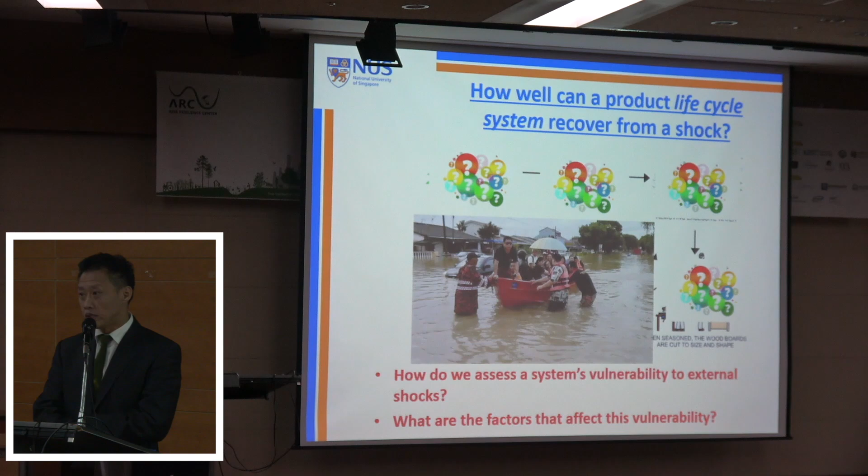How about the upstream processes or upstream life cycle stages, like in the forest, if access to the forest is affected? All the downstream life cycle stages will be affected as well. So the research questions therefore are: how can we assess a life cycle system's vulnerability to such external shocks, and how can that vulnerability be reduced and resilience be increased?

So guided by these questions, we went on to look for a framework or model to see how we can do these two jobs better. The content of my presentation today is going to start with a very short discussion on the concepts of resilience and sustainability.

So if we are setting off to look for a framework to talk about life cycle resilience, life cycle sustainability is a good place to start. And by that, we have to look at some of the existing LCSA, or life cycle sustainability assessment frameworks we have. Today I'm just going to very concisely present two of these.

I'm going to start with this one, which is basically an LCSA framework that combines all the different LCAs of environmental impact, costing, and social LCA. Not too long ago, a few colleagues of mine from the International Society for Industrial Ecology came out with this different framework. Basically what they've done is taken the conventional ISO way of doing LCA, identified this, and modified it into this.

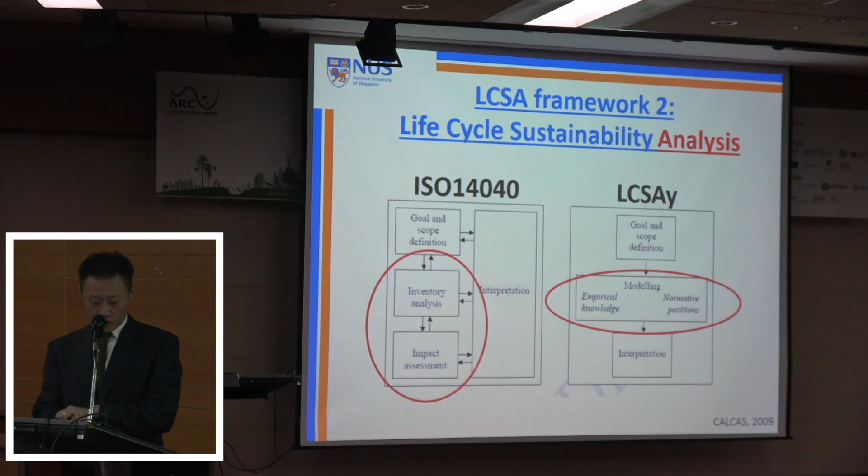If you allow me to blow this up so you can see what's inside, it is this massive flowchart. To summarize, what they are trying to say is that when doing life cycle studies, we have to broaden the object of analysis. So it's not just on the product level anymore, but all the way up to the economy level. That's when you can see even more trade-offs and interlinkages.

Furthermore, at every level, they encourage us to look at all three aspects or domains of sustainability: economics, social, and of course environmental effects. So by that they mean we have to broaden the scope of indicators.

So is that the most perfect framework out there? Well, not quite. What I mean is that although they have identified stakeholder engagement as key, as well as uncertainty analysis, you find these are still missing pieces. We need more wisdom and input in these areas. And there are more. These are the 4 points I've identified when it comes to pinpointing the missing pieces of these existing frameworks.

And the first point here is definitely on the very concept of resilience and vulnerability and how they can be applied to a life cycle system.

So with that knowledge, and the fact that there are 4 gaps in the current framework, and these are the 4, we have come up with a new model. Some of us call it the framework known as LiCSUA, or Life Cycle Sustainability Unified Analysis. Long word, that's why we need an acronym.

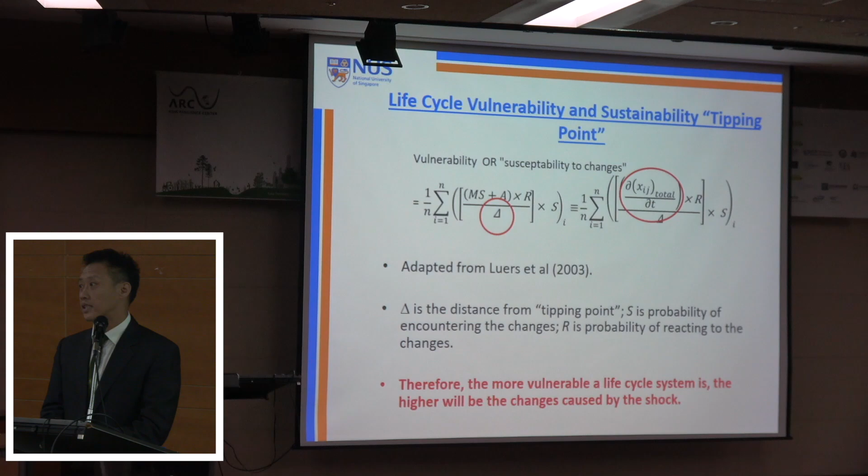Okay, can it be used? Yes, we have shown how it can be used, and I'm going to make use of a case study of wood plastic composite to show how this particular framework can be used. Bearing in mind, once again, that I'm not saying this is the only way of creating this model and framework out there. There are many different ways, I believe, but ours may be the first life cycle resilience model out there.

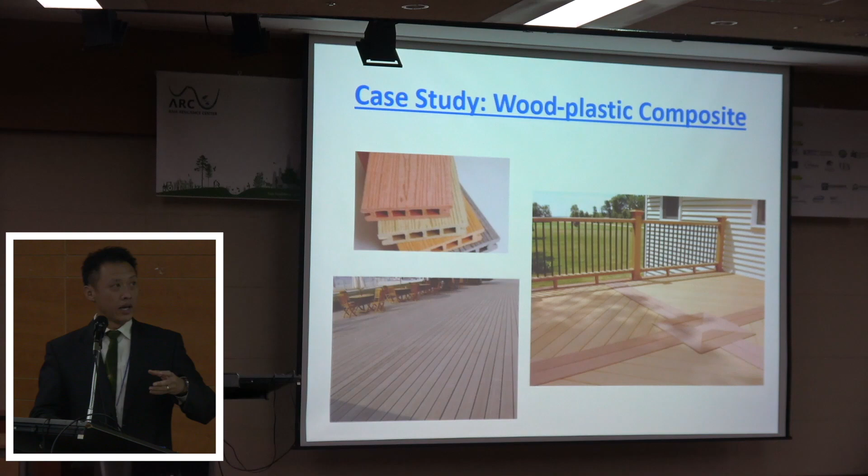So, wood plastic composite is a kind of material that combines plastic, most of which recycled, and recycled wood fiber to make different components like this. It is quite an effective way of using recycled materials.

So the background of the problem statement is this: we assume that there is a policy being made, and the success of this policy is on the number of local residents who are engaged and who really devote their time to doing waste sorting behavior. And all these are just the way we set up the model.

And most importantly, a shock, a flash flood, is introduced in the system. So how does the wood plastic composite life cycle system react to this shock, and what can we do about that? We went on to define the rebound effect, and I have to say that this rebound effect is not a real effect. We are just trying to see how this system will react should there be such a rebound effect. And of course, we have defined this mathematically in our model.

So what have we got? Before that, more details about how we have defined the interdependencies of life cycle stages and the stage resilience. Once again, this is what I've shown you just now. By interlinkage and by dependence, what I mean is that this particular life cycle stage, for example, is dependent on how much you can access and get from the forest, and so on and so forth.

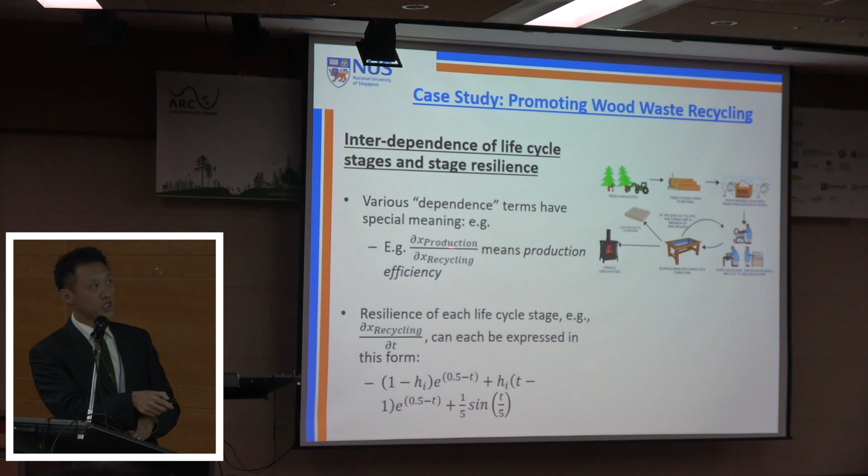And in this case study, you'll find that all these mathematical terms suddenly hold physical meaning. For example, this particular term means production efficiency, and that is how much you have recovered is actually used to produce the WPC, and so on.

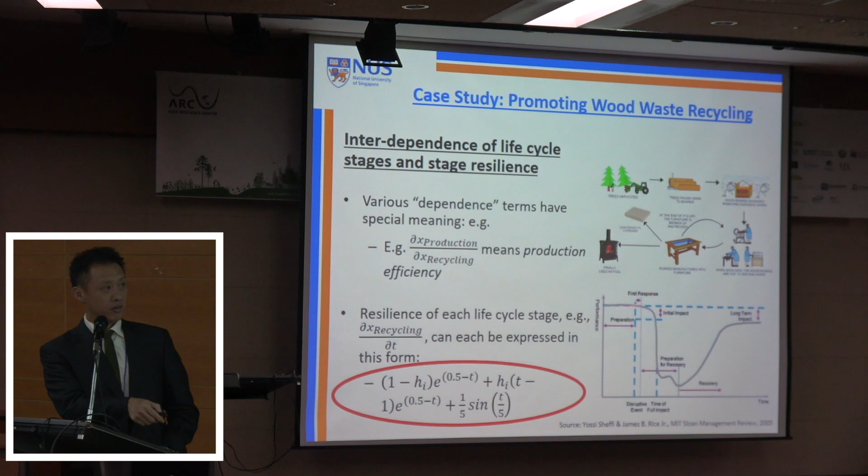And the resilience of each life cycle stage, these terms are given this particular form. This may sound and look scary, but they are not. In fact, this is the kind of equation that you get for describing this popular curve that shows how a system rebounds or how a system recovers after a shock.

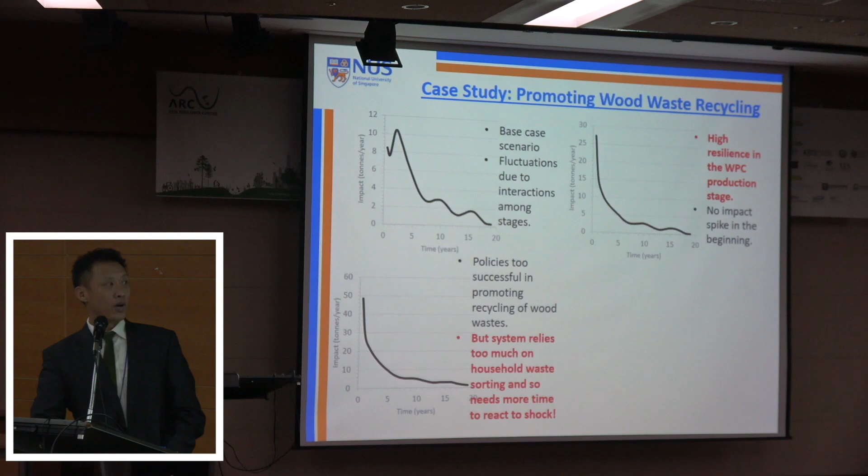What happens if the policies have been too successful, talking about trade-offs or unintended consequences? What we found is that sometimes when a policy is so ingrained, so successful, it really depends on our ability to sort our wastes. When it comes to flash floods, the last thing in mind will be to sort our wastes. If that happens, the whole system runs into havoc, and it takes a longer time to recover. So too much of a good thing may not be good after all.

That's a lesson that we learned.

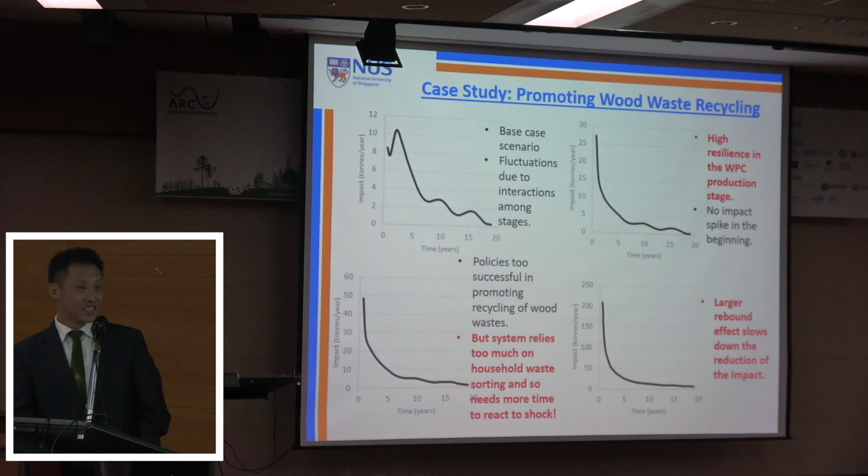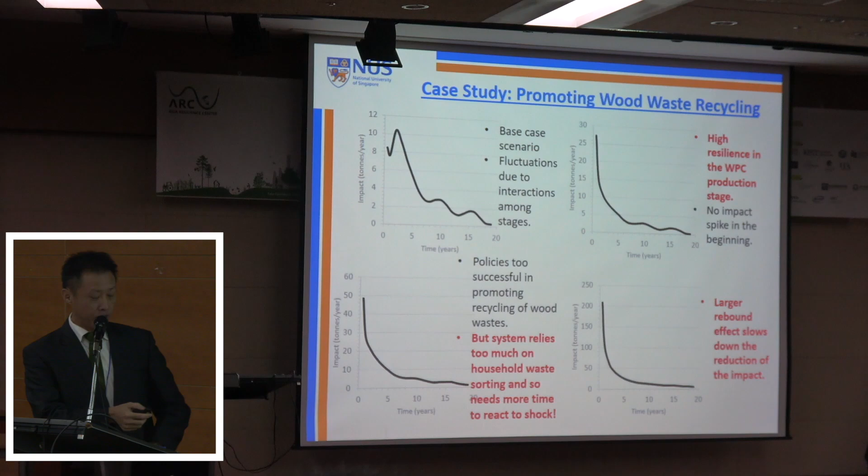Last but not least, what happens if we have a larger rebound effect? If we have a larger rebound effect, that reduction is going to slow down even more. I published this not too long ago in the Industrial Ecology Journal.

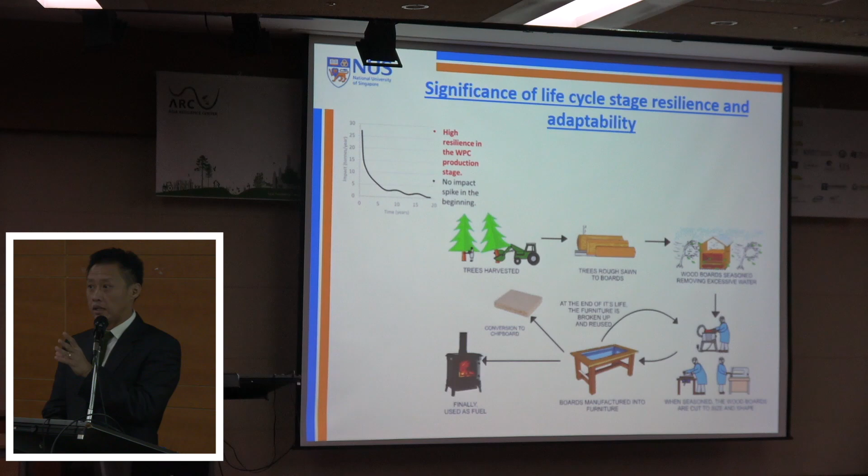Of course, this idea about how individual life cycle stage resilience can help focus the different types of research is helpful, and I would say this is what pushes us, the university as a whole, to look at the different types of resilience research.

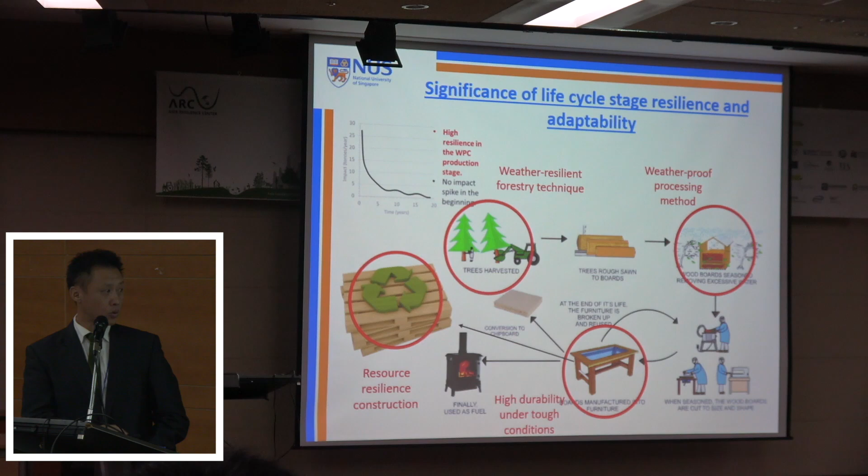My other area of research is resource resilience construction, and that brings me to the other part of my research, which I intend to just very briefly go through.

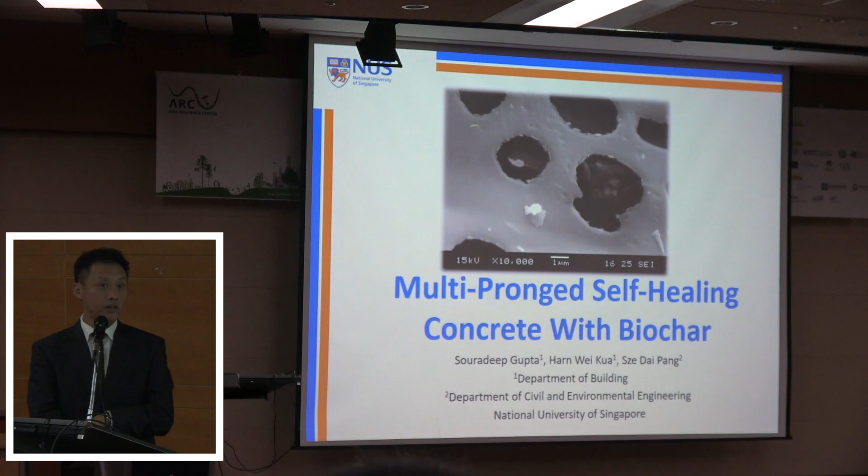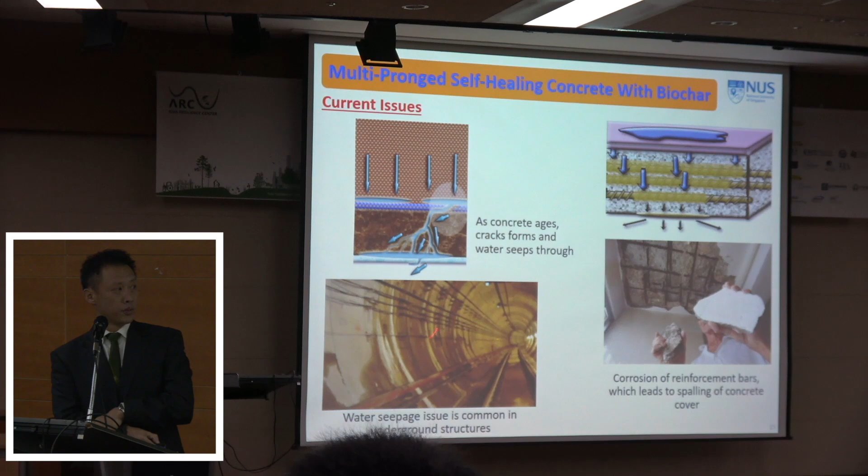It is about how we can make use of biochar to enhance a certain aspect of concrete, which is the self-healing aspect. We know that when concrete ages, cracks will form, and water will seep through, which can cause a lot of problems like spalling. This will be a major problem if we are talking about underground construction.

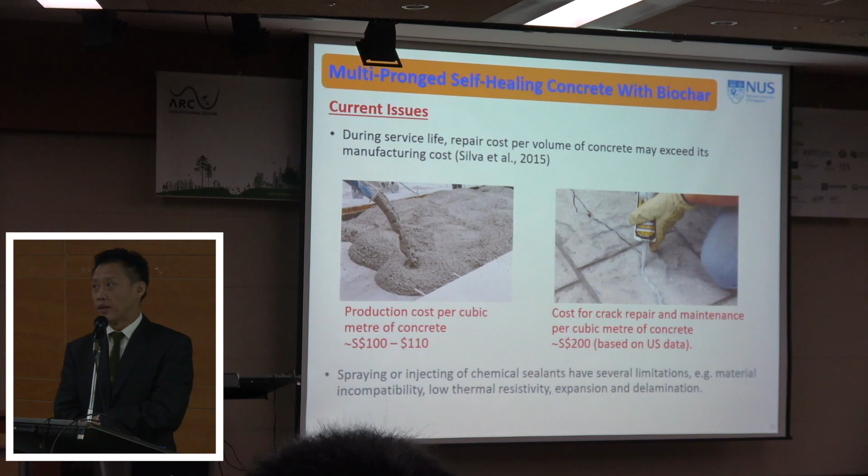In case you are thinking of just replacing cracked cement with new one, it's not going to come cheap, and not to mention that it may not even be effective. So what we have come up with is a combination of different materials and substances.

Like using fibers, using bacteria, and the bacteria is kept, or housed, in biochar, and of course SAP, or super absorbent polymer, which is a term that most of you are familiar with. With the proper mix, we are able to make the sealing of cracks much better.

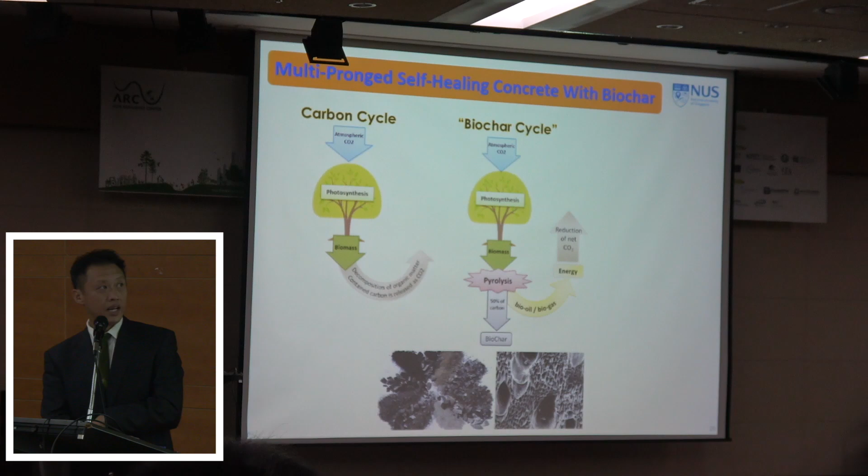For those not familiar with biochar, it is just a way for us to recycle biomass. So instead of letting it decompose and return the carbon back into the environment, what we have done here is make use of pyrolysis to produce biochar as one of its byproducts.

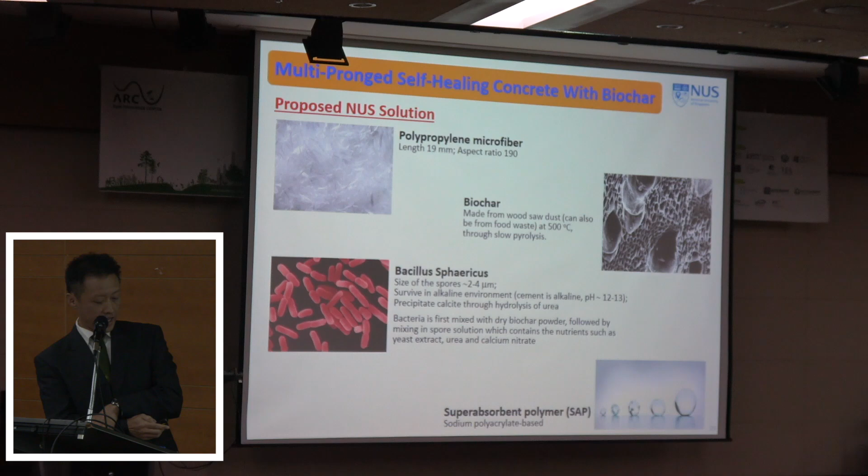And then make use of that in this research to house the bacteria. This is what we talk about here. The biochar is made at a specific temperature, and these are the main results that I'd like to share with you.

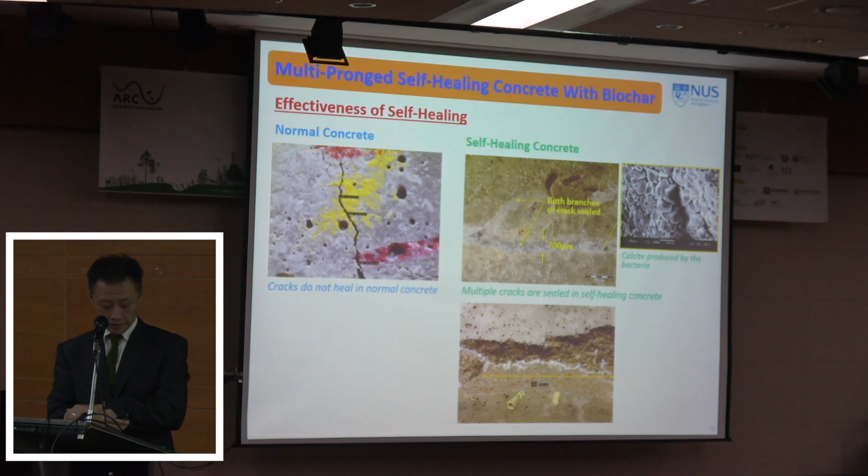Since when we set off, we wanted to address the water infusion problem. How can we be so sure that this bacterial self-healing concrete is able to solve that problem? Well, we did a kind of test that shows us how this is possible.

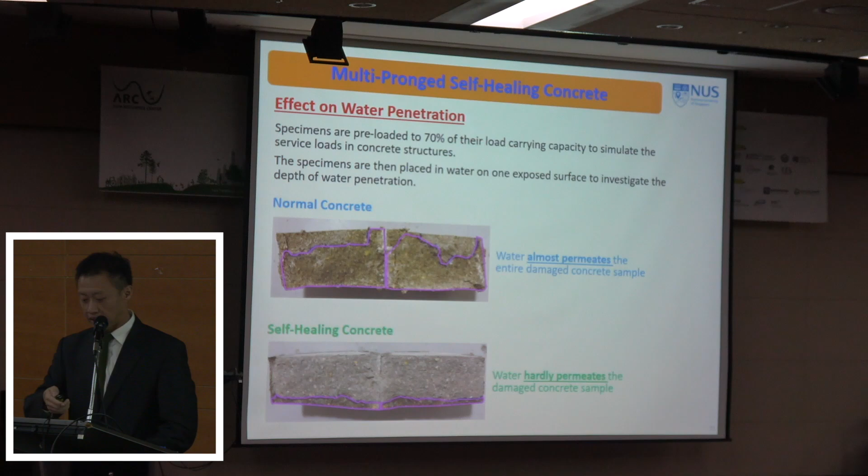So we make use of a different combination of mixtures, and we find that when we have self-healing concrete, the infusion of water from the bottom is drastically reduced, which means that there is substantial crack sealing taking place here.

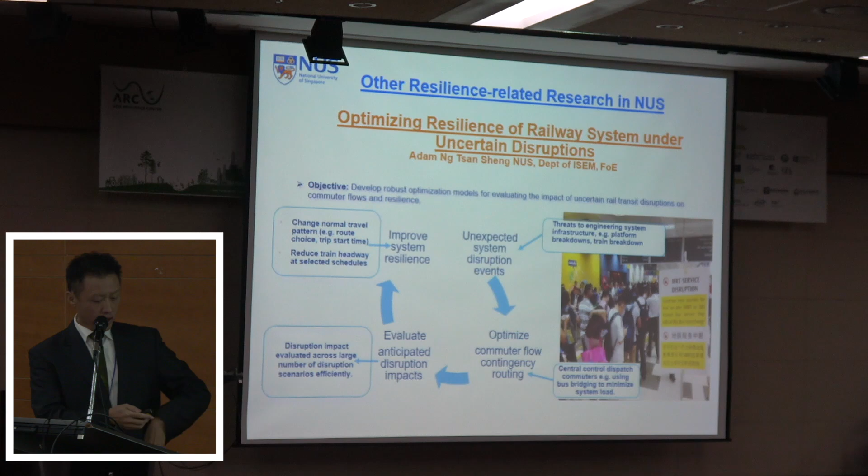So this is research done by one of my colleagues from another department in system engineering, in which he made use of an optimization model to see how we can reduce the overall impact of any disruption in our train system, which has become quite notorious in Singapore on residents and commuters. I'm not too sure whether I have time for this.

This is one of the latest projects which I finished with the help of my two assistants. Basically, it's a combination of architectural design research, as well as the use of life cycle assessment. When we set off, we basically thought about how we can reduce the overall impact caused by renovation of buildings, and to be exact, school buildings in Singapore.

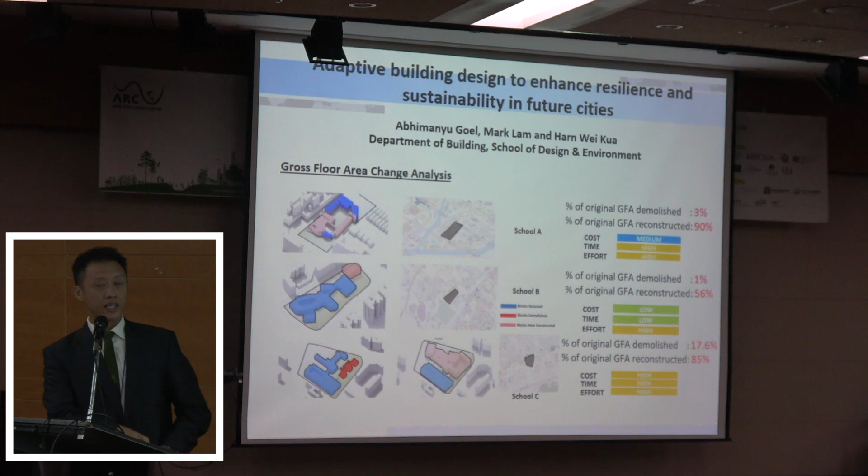So over here, the third example, school C, we find has got the highest impact. So what do we do about that? We come up with a new method of design and construction, and that is, instead of tearing down and building back up again, we identify certain blocks, in this case the E block, where we can extend upwards in order to accommodate more space. But to do that, we have to rearrange the space as described over here.

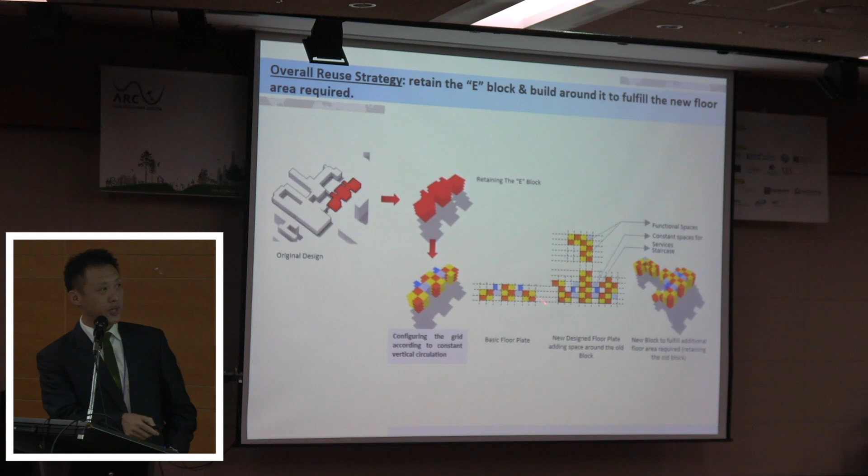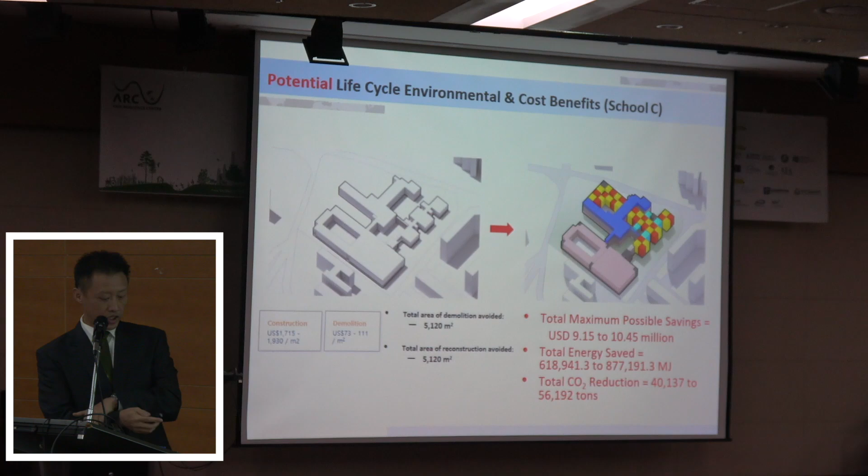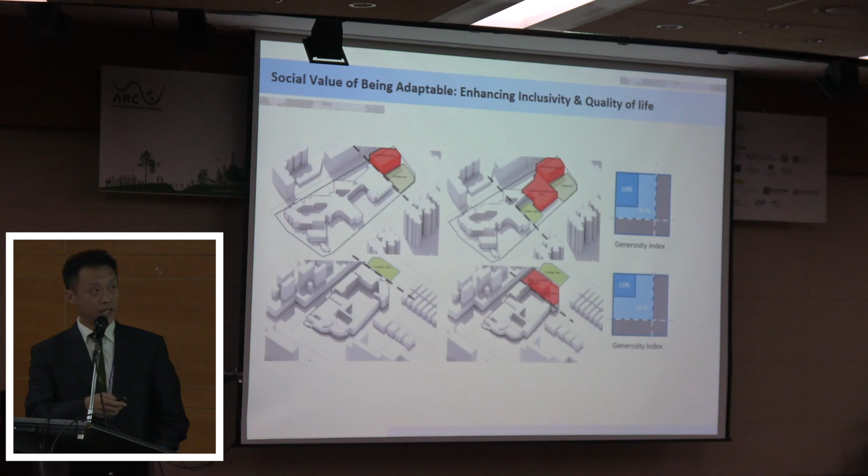So what we have done further is to quantify the life cycle benefits of this in terms of the cost saved as well as the CO2 reduction possible. Besides that, we also design into this whole fabric a space that can open up to allow the community to use. By that, we define a certain index known as the generosity index.

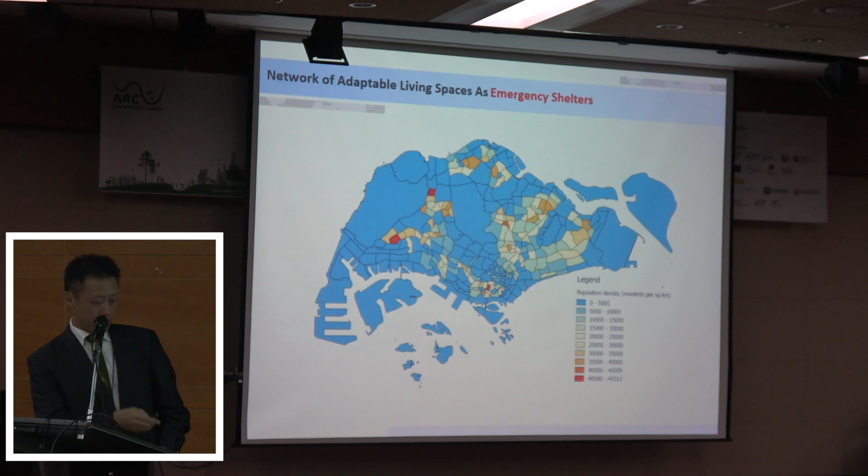And of course, this is the last bit. This is a map of Singapore. It basically shows you where we are, as well as where most of the population is. And if you look at this, you find that the darkened area is the highest area, or some of the highest areas, in Singapore.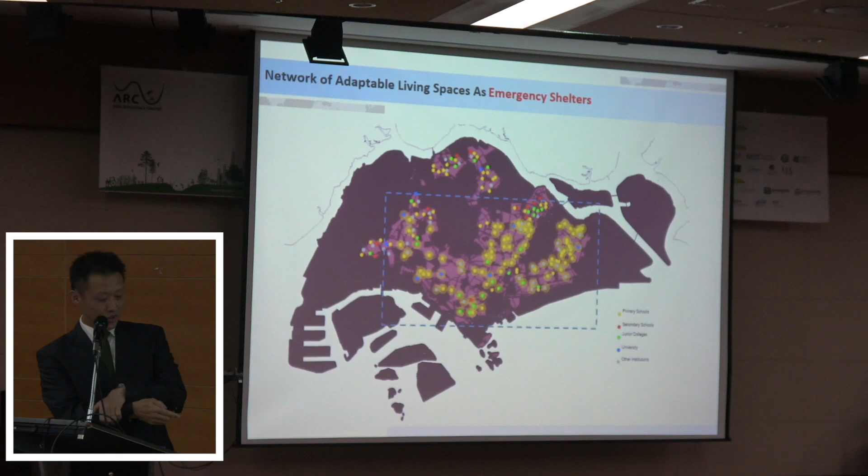Singapore is quite a flat country, so the darkened areas are basically areas above 5 meters. If you superimpose these two slides that I've shown you, you'll find that most of the schools actually happen to be right in the center here. So the good news is that we can make use of schools, provided that we redesign the space as a center for people to go to as shelters in case there are massive floods all across the country.

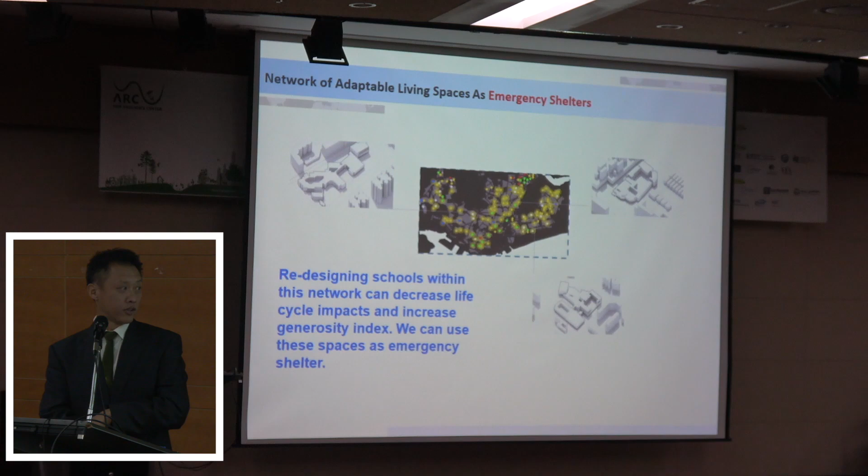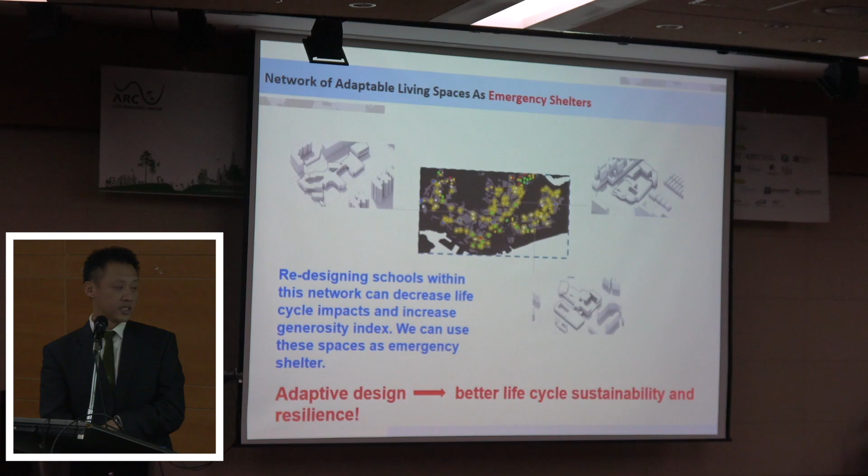So in a nutshell, we feel that by designing schools within this network, we can help to reduce life cycle impact as well as increase the generosity index. And of course, that can be used as spaces for emergencies or shelters. In other words, adaptive, flexible design can lead to better life cycle sustainability and resilience at the same time.

So in conclusion, I feel there should be much more effort on how the resilience of the life cycle of a product or service should be given more attention. And of course, second point, as I've shared with you, in our university there are many ongoing research projects on resilience. So if any of you are interested to know more, feel free to come talk to me. Thank you very much, and acknowledgement to our funding agency.